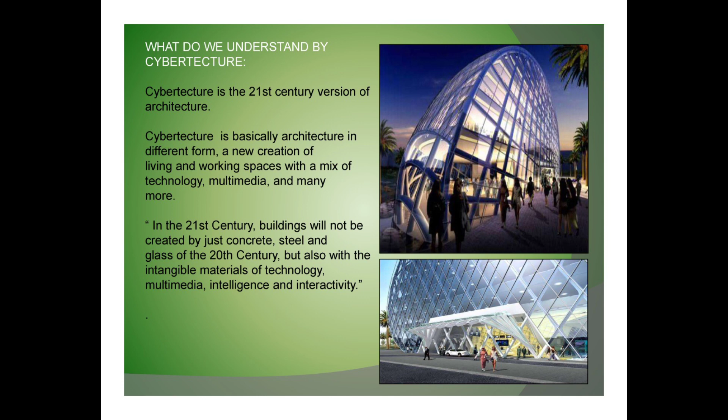So, first of all, what do we understand by cybertecture? Cybertecture is the 21st century version of architecture. It is basically architecture in a different form, a new creation of living and working spaces with a mix of technology, multimedia, and many more.

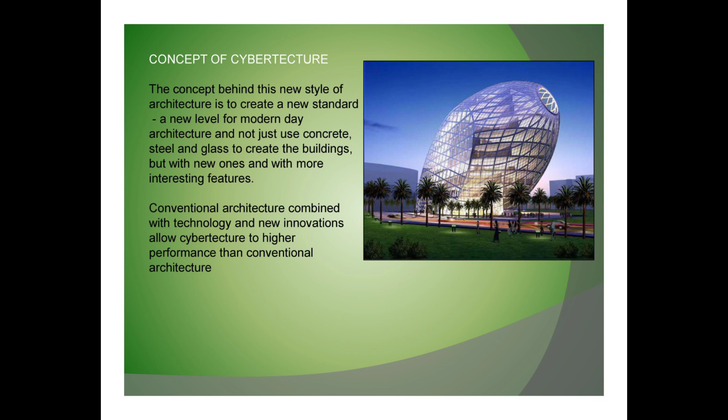Moving ahead, what is the concept of cybertecture? The concept behind this new style of architecture is to create a new standard, a new level for modern day architecture, and not just use concrete, steel, and glass to create buildings, but with new ones and more interesting features. So, next is why do we need cybertecture?

The need for cybertecture is especially applied for the better use of energy, recycling of resources, and greater intelligence of the building. Next is what is the advantage of cybertecture over conventional architecture?

Cybertecture utilizes the latest innovations in technology and concepts to create new buildings that can perform at a higher and broader level than conventional architecture. These buildings are intelligent enough to know and talk to occupants, take care of their health, deal with energy used in the building by having sensors that know how best to modulate systems, and also interact with value added services to empower people to live, work, or play in a more powerful way.

So here is a case study on Cybertecture Egg, which is located in Mumbai. Moving on to its introduction, the Cybertecture Egg is a cybertecture building that brings together iconic architecture, environmental design, intelligent control systems, and evolutionary engineering to create the most innovative building for the city of Mumbai and for India in the 21st century.

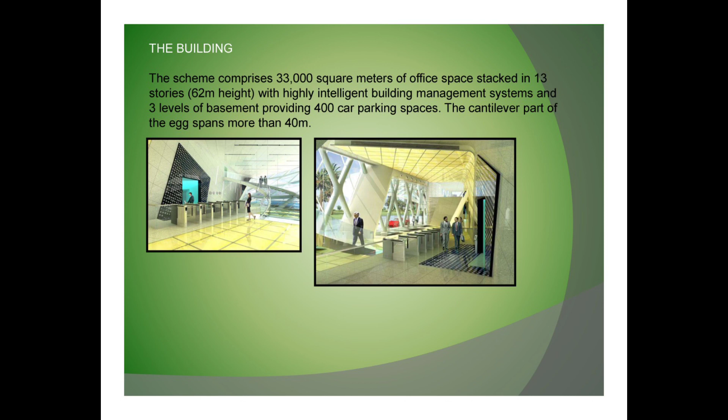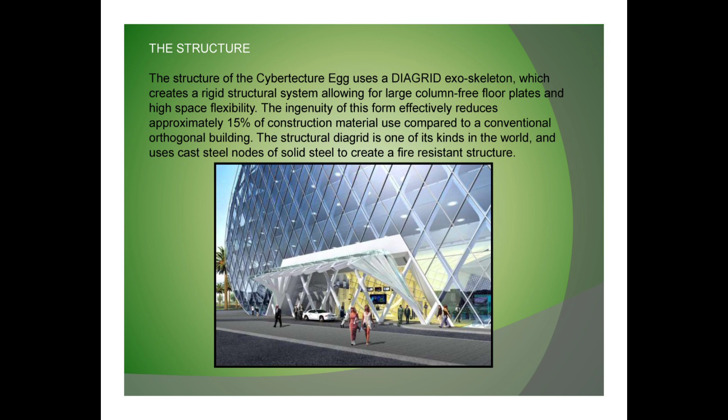Talking about its structure, the structure of the Cybertecture Egg uses a diagrid exoskeleton which creates a rigid structural system allowing for large column-free floor plates and high space flexibility. The ingenuity of this form effectively reduces approximately 15% of construction material use compared to a conventional orthogonal building. The structural diagrid is one of its kind in the world and uses cast steel nodes of solid steel to create a fire-resistant structure. Now, what are the benefits of the diagrid system?

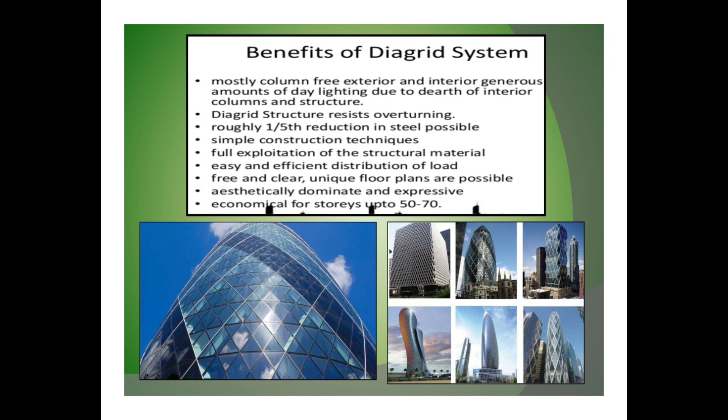Basically there are several benefits of the diagrid system. One of the major benefits is that it resists the overturning of the structure. Secondly, there is a possibility of reduction in steel of about 20%, and also easy and efficient distribution of the load.

What are the differences between conventional exterior braced frame structures and diagrid structures? Number one, diagrid structures are much more effective in minimizing shear deformations. Number two, in diagrid structures the core can be designed to carry only gravity loads without any bracings. Number three, conventional vertical columns are eliminated in diagrid structures as compared to conventional structures.

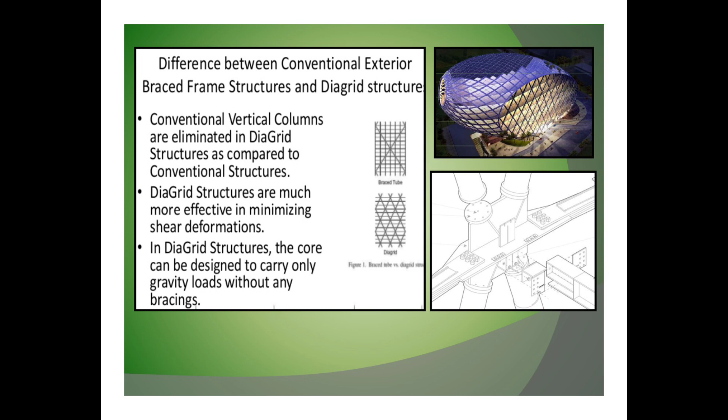Talking about its design features, the design of the building attempts to decrease energy demands through passive solar design. The construction of an elevated garden helps to cool the building through a process called thermolysis, and photovoltaic panels and wind turbines are implemented on the roof. Even water conservation is taken care of with the incorporation of a water filtration system that recycles grey water for irrigation purposes.

Now, talking about the ecosystem of the building, it has an ecosystem of environmental technologies that makes the project one of the most sustainably advanced designs in the world. About 20% of the water usage of the building is recycled through the rainwater harvesting system, sewage treatment, and wetland cell systems. The building's air conditioning is done by naturally cooled water from an underground reservoir. The building management system installed makes sure of the reduction in energy usage in less utilized and less occupied spaces.

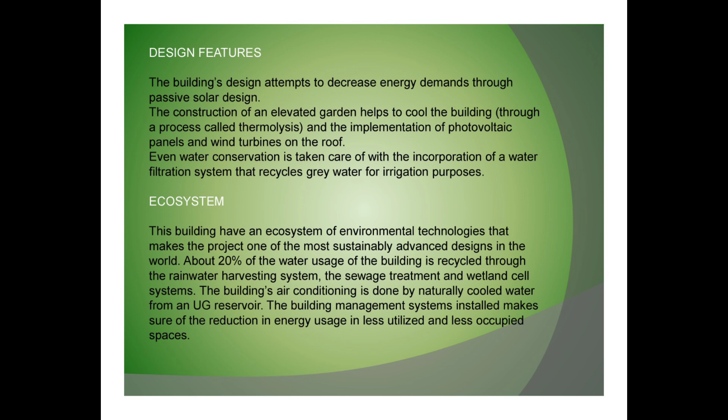Now, talking about the green features of the building. Number one, orientation of building: it is oriented towards the ideal direction that minimizes solar and heat gain. Number two, sky gardens: green areas of the building provide sun shading, oxygen replenishment, refuge areas for people, as well as cooling for buildings, and wetland filter beds for water recycling.

Number three, photovoltaic farms: photovoltaic cells are integrated into the facade facing the sun to help provide an alternative electricity source. Number four, intelligent glass facade: the building's glazing has variable tilting and turns based on sun orientation, as well as variable shading and tinting.

Number five, water recycling system: the recycling of potable water is done through a combination of rainwater harvesting systems, sewerage treatment, and filtration and wetland cell systems. These effectively recycle up to 20% of the water supply consumption of the building. And the last one, underground water cooling: related to the water recycling system, the underground cooling system embedded deep underground in a reservoir provides naturally chilled water for the building's air conditioning.

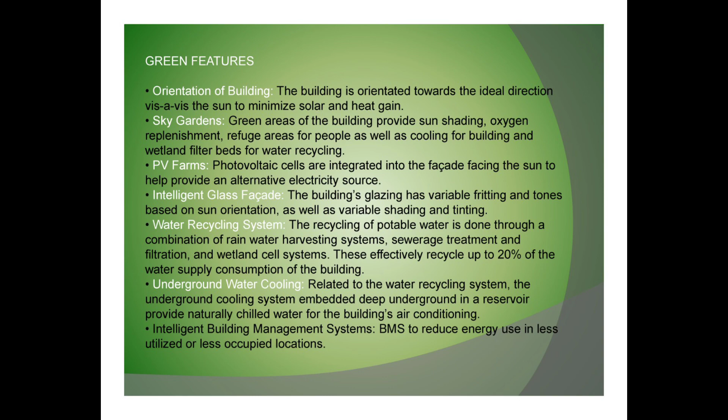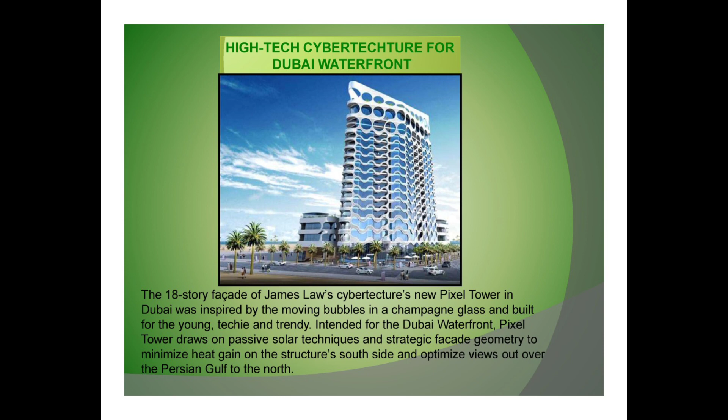Now, let's talk about the major challenges faced in India in launching cybertecture. The main challenges include education and understanding of the concept for established developers, builders, and local governments. The old conventional architecture seems enough. Only when people become aware of the potential of cybertecture will they know that this is the only way India can accelerate long term development of much needed infrastructure. Applied in buildings designed for India, the concept of cybertecture will allow Indian buildings to be ahead of global trends.